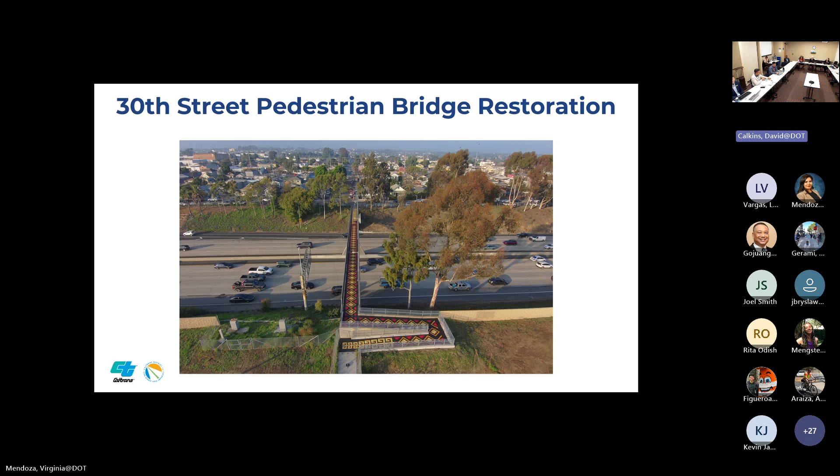All right, so next we have our California Walk and Bike Technical Advisory Committee update. Everett, are you on the line here today to provide an update?

He may not, but I have the text. Okay, Brian Gaze again, I actually sit on this committee with Everett, and unfortunately I don't believe either of us made the meeting, although I do have the agenda up front. Oh, there he is. I didn't know if you were on or not. Sorry, I think we meant to hit mute. Okay, no worries. Yeah, so basically, to be honest, the last time we were here at this meeting, I kind of presented on this as well, and it actually looks like, based on what I see on the agenda, it's sort of a similar update.

They always give a really good legislative update in terms of new initiatives winding through the State House. There's an update on transit policy, which I assume aligns with the policy just mentioned. Then another emphasis on transit, on some work being done in D4, a toolbox of strategies and applications on transit and bike-ped access, and then just local updates. So I wish I had more to report. Everett and I both had conflicts, so on behalf of everyone from D11, we apologize for not making that statewide meeting, but won't happen again, right Everett? So anyway, transit focus, legislative updates, and more to come.

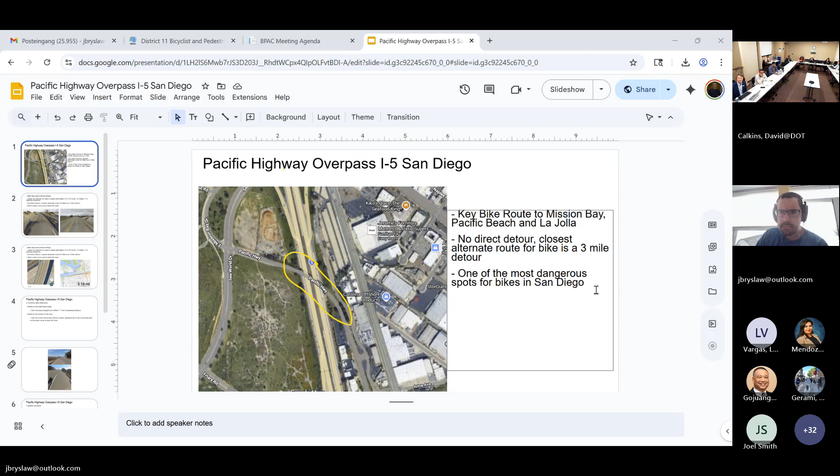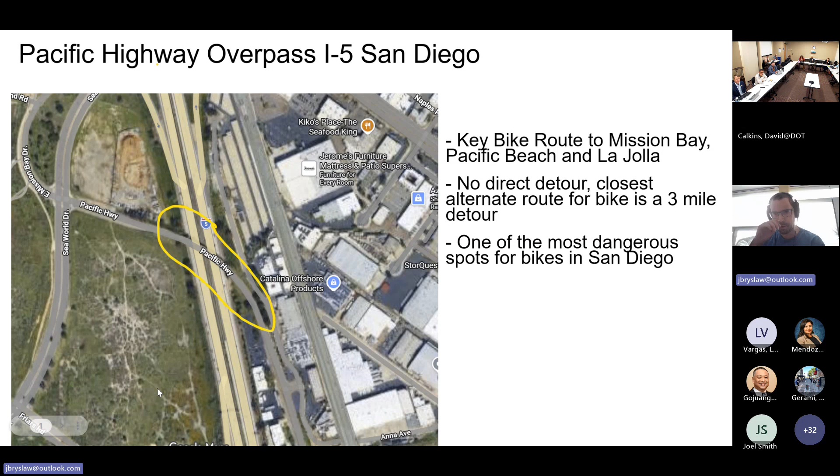Okay, thank you. So I just want to take a few minutes to discuss this. This is the Pacific Highway overpass over I-5 in San Diego, and it's a key bike route to Mission Bay, Pacific Beach, and La Jolla. But it's one of the most dangerous spots for bikes in San Diego, and there's no direct detour. The closest alternate route would be a 3-mile detour.

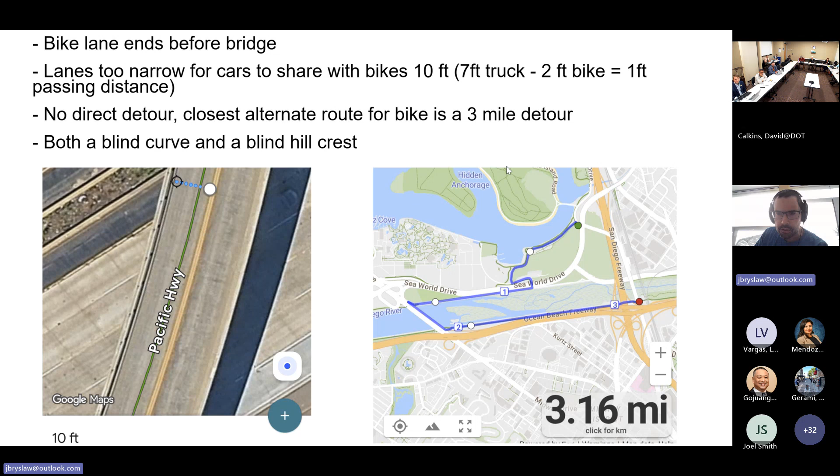The problem is there are bike lanes on the road before the bridge, but they end right before the bridge. And on the bridge, the overpass, the lanes are too narrow for cars to share with bikes. They're 10-foot lanes, so for example, if you have a 7-foot pickup truck and a 2-foot bike, that would leave less than 1 foot of passing distance. I show the measurement here. And like I said, here on the right, the closest detour is a 3-mile detour.

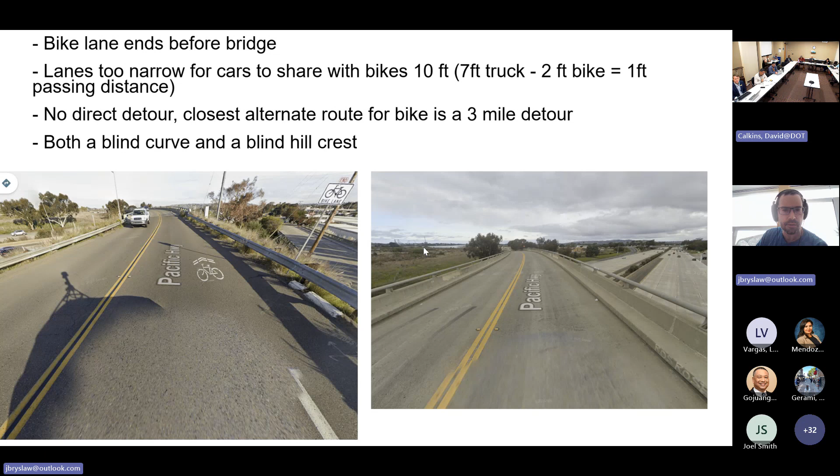The other problem is the bridge is both a blind curve as well as a blind hill crest. So when you're going over the hill, you can't see past the crest, which means it's also dangerous for cars to pass in the second lane.

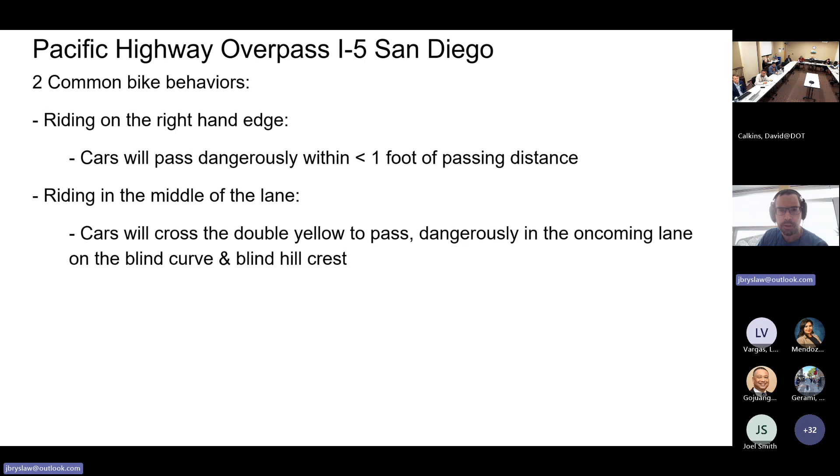So there are 2 common ways bikes will approach this. The first is a bike will ride all the way to the right. If you do that, cars will pass dangerously within 1 foot of you. The second most common behavior for bikes, and actually there's a sign saying you can be in the middle of the lane, is to ride in the middle of the lane. But if you do that, cars will cross the double yellow to pass into the oncoming lane on the blind curve and blind hill. I just wanted to show a video where you can see both.

So I was just wondering, since this is such a key route, if something could be done. I'm not sure exactly what the best solution would be. Perhaps lowering the speed limit, traffic calming so that drivers don't feel the obligation to pass bikes, maybe signs saying explicitly not to pass bikes, or maybe a flex post median. Thank you.

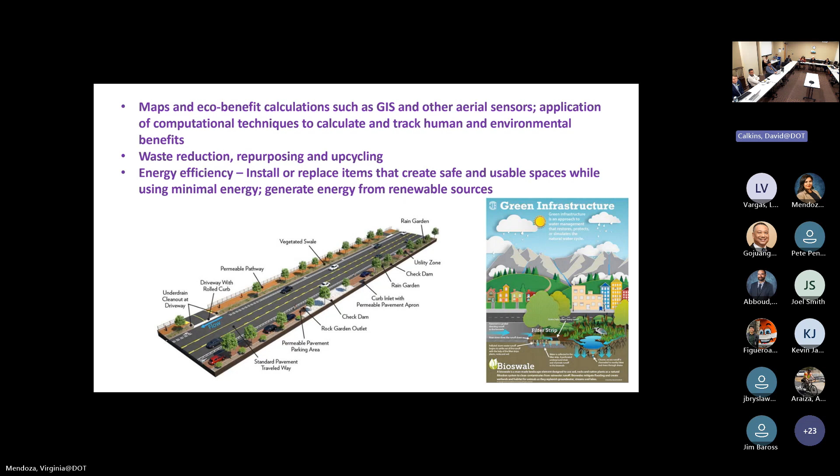So what are the benefits to Caltrans of using carefully designed green infrastructure? There's increased safety by reducing flooding, erosion, heat, air pollution, water pollution.

One of the projects we're working on now is for the Mountain Empire School District on excessive heat, out in Campo Elementary and Campo High School. Who would have thought that's green infrastructure, but that is certainly part of it.

Increased habitability, including for bicyclists and pedestrians, reducing heat and pollution as I just mentioned. Increased accessibility by designing passages that are safe and habitable, contributing to Caltrans goals. You have goals now about sustainability at the state and local level, quantifiable benefits of reducing air pollution, stormwater runoff, erosion prevention, water retention, all of that. And again, it's quantifiable because it's measurable.

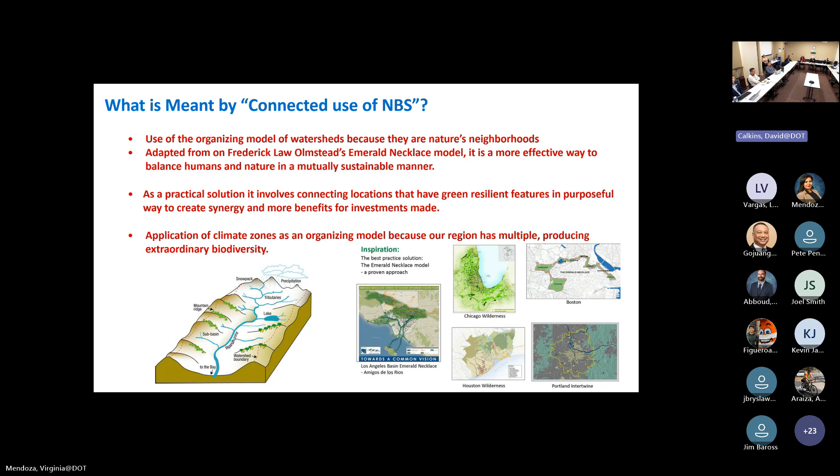Watershed-based planning, and unfortunately, if we had done all our community and neighborhood plans based on watersheds, things would be different. There are some places around the world doing that, and it makes so much sense, right? The watershed isn't just a visual, it's water, it's your own little contained living room, so to speak. We started to look at that as perhaps a basis for some of our concepts. Next slide.

As you know, these are our western-facing watersheds. And we chose, you'll see a little bit about a report in a bit, to focus on the San Dieguito and Otay River watersheds as the two we started looking at in more detail. Obviously there's a lot more.

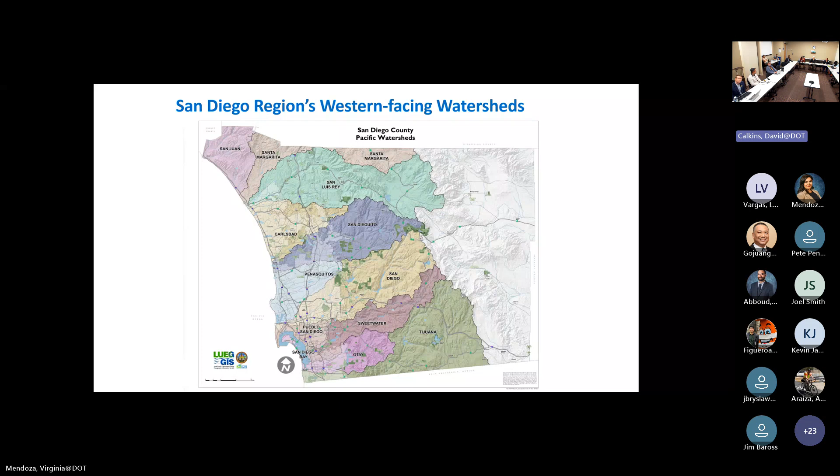Now the next slide, when you overlay that with our county climate zones, you begin to see that, obviously there's a lot of different versions, but this is considered from the Natural History Museum, some of the major climate zones. Next slide, put these two together.

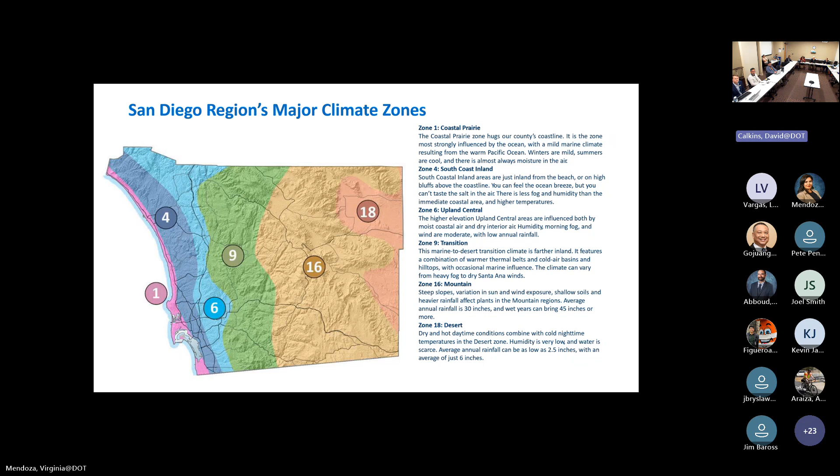And you get this kind of tapestry. Next slide, please. You can see the watersheds with the climate zones, and you kind of get this little embedded matrix of things.

To do really good green infrastructure, nature-based, you've got to do what's unique to that area. For example, I'm not going to put Torrey pines that are native up here in La Jolla down in Otay Mountain. It doesn't make sense, right? And how native is native? So next slide.

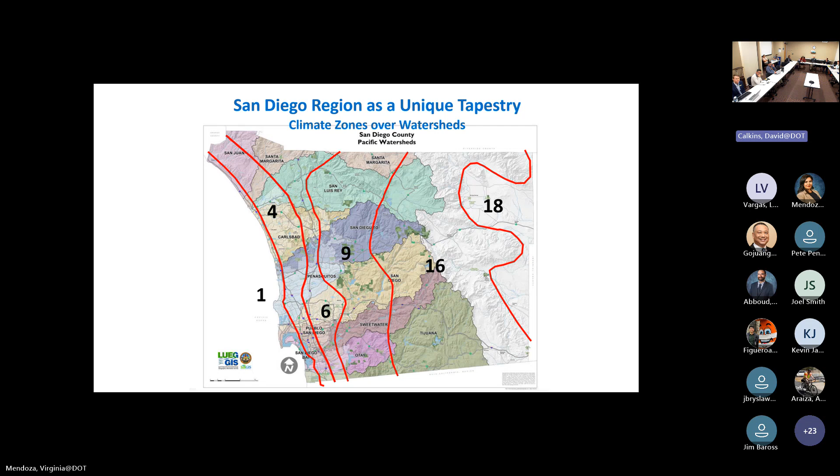One of the things, unfortunately, different cities have different values, but we really are in a race against time to shape our region to be as sustainable as possible and as resilient as possible. We've had fires that have wiped out massive areas, and when sea level rise happens, the same will happen on the opposite side. So the status quo, what we're doing now, really needs to change.

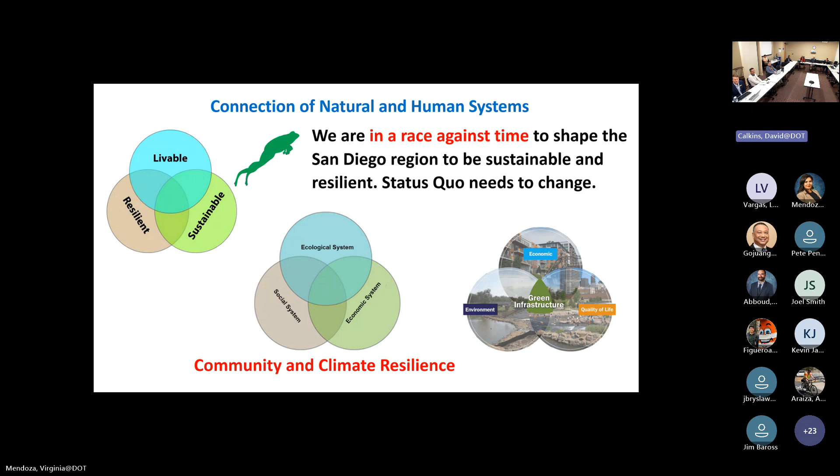I'm not going to get into all the detail of these diagrams, but essentially the frog represents - I know it's kind of funny - leapfrogging forward. It's livable, sustainable, resilient. Those are key factors as we go forward. Next slide.

So some of the projects that we worked on—boy, that is dinky from back here, isn't it? I'm going to cheat and bring up my phone as well, so I can at least read it, because I don't have this quite memorized.

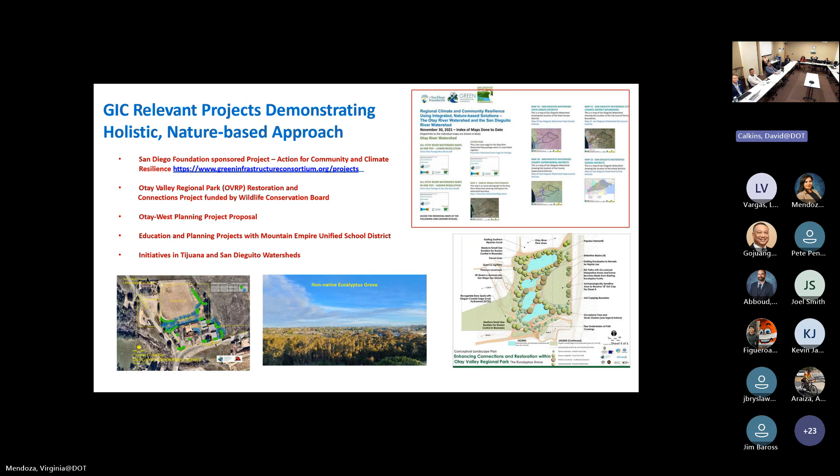Again, it's all about being sustainable and reusing what we have. The grove in the lower picture is what it looks like looking north from just off of Main Street.

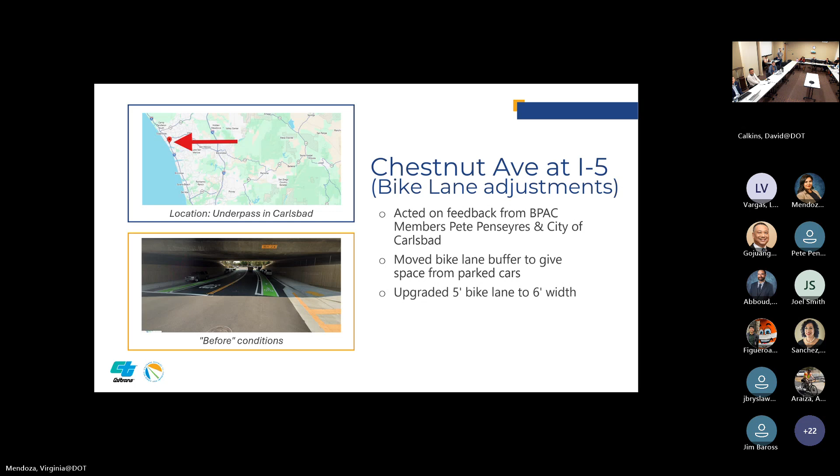Yes, we have an update in Carlsbad. At the last meeting, there was concern brought up about the newly constructed bike lane in the door zone, and you can see the before conditions there. We worked with the city of Carlsbad and Caltrans functional teams to increase the size of the bike lane and move the buffer to the door zone. As Keith mentioned, we've worked on that. It's very close to being completed, but as of today it's still being finalized with the contractor. We have the plans here that are all approved, so you should be expecting to see that at Chestnut very soon.

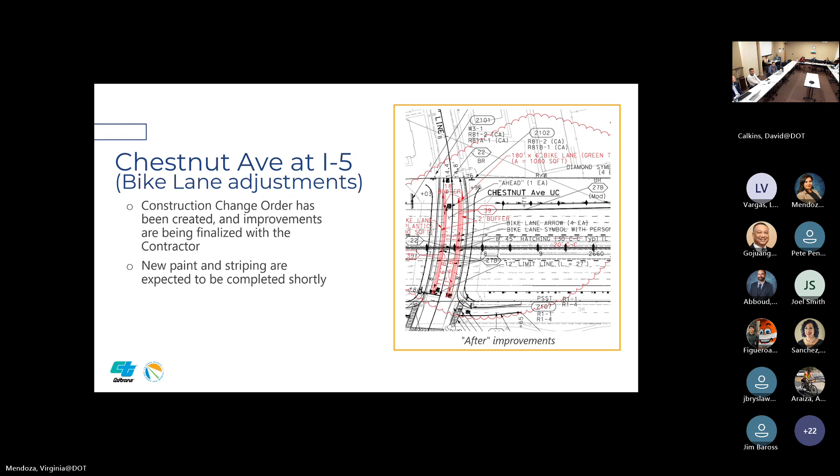So we recently received some inputs on the off-ramp at Palm Avenue at I-5. We fed this through our internal system, conducted an investigation, and it's been approved to install no right turn on red signs. So that's been approved, it's just awaiting funding. I think that's all for this one.

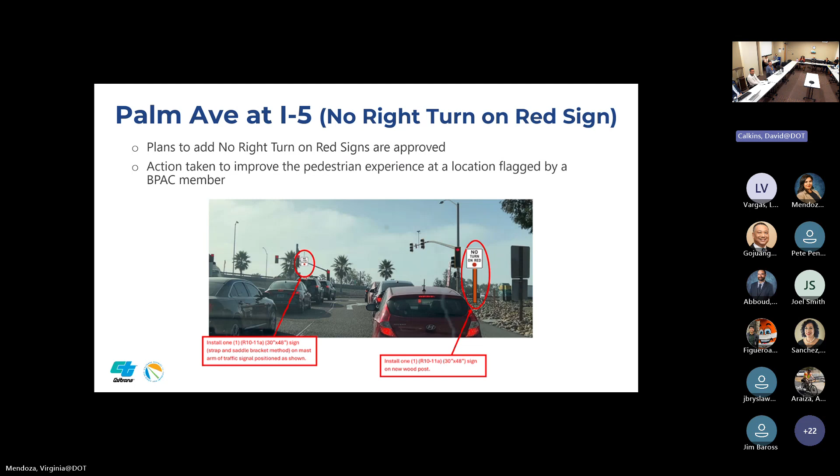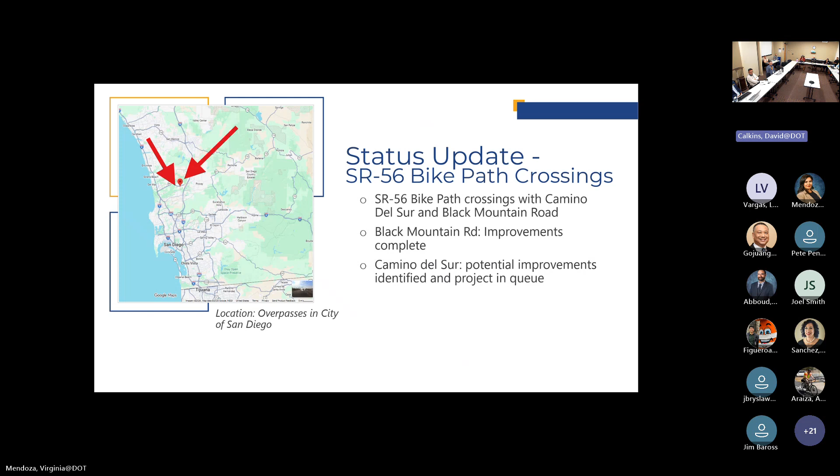Next, we got lots of comments on SR 56 crossing the bike path at Camino del Sur and Black Mountain Road. Did the same thing - there are actually some projects in recent history that were finished and installed, and one that was investigated and approved and is also awaiting funding. So I'm going to show those right now. The first one is Black Mountain Road.

So like I said, this was in recent history. The project was approved and it's out in the field. We did install enhanced signage and a blank out no right turn on red sign. So right turns are restricted on the off ramp, eastbound off ramp going south, and northbound going onto the eastbound ramp.

Sorry, didn't get a map there. Next one.

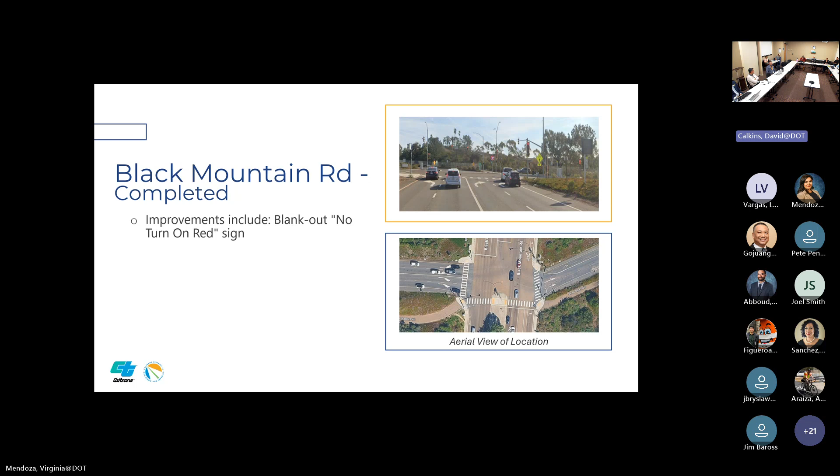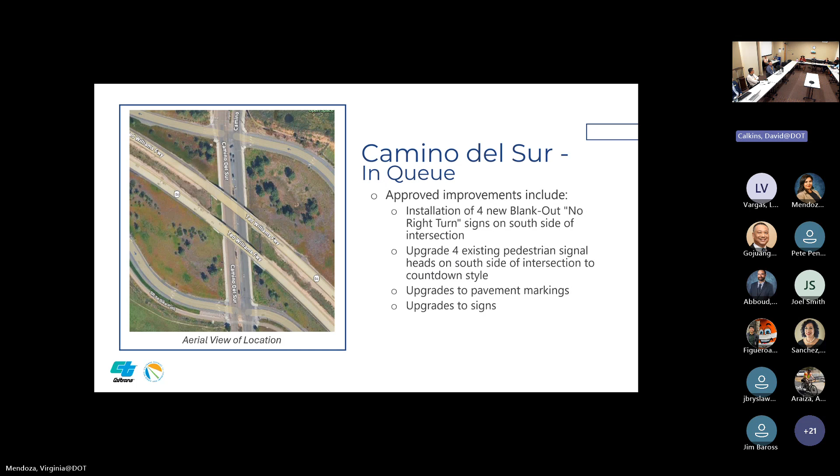So this is a similar situation, and it's going to have more of a suite of upgrades. Can you go to the next slide?

So with this one, this diagram is showing the similar upgrades. There's going to be the same no right turn on red restrictions. There's going to be enhanced bike lane striping, green striping. There's going to be PED countdown at the crossing there, so bikes can get a timed crossing, as well as pavement markings on the bike path on the approaches to the intersection, Camino del Sur. So, like I said, this is approved and it's awaiting funding.

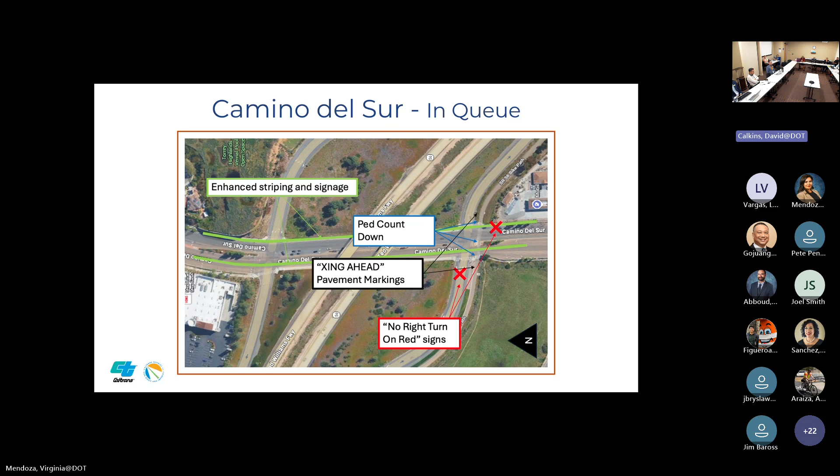Yeah, and I believe that's it for this section. Next slide.

Great. Are you giving this one, Trey? Yeah, sure. All right, thank you, Alex.

There was another comment at the last BPAC meeting. It's come up in prior BPAC meetings asking about how you can cross I-8 west of Morena by bike. And because this has been brought up several times before, we thought it'd be good to try giving you a more broader view of what has been done and what's going on in the future. In the slides you will see some links with resources to where you can see each of these specific plans and projects. So we'll quickly go over some recent accomplishments, including Caltrans, and then long-range plans, which also include work by SANDAG, City of San Diego, and others.

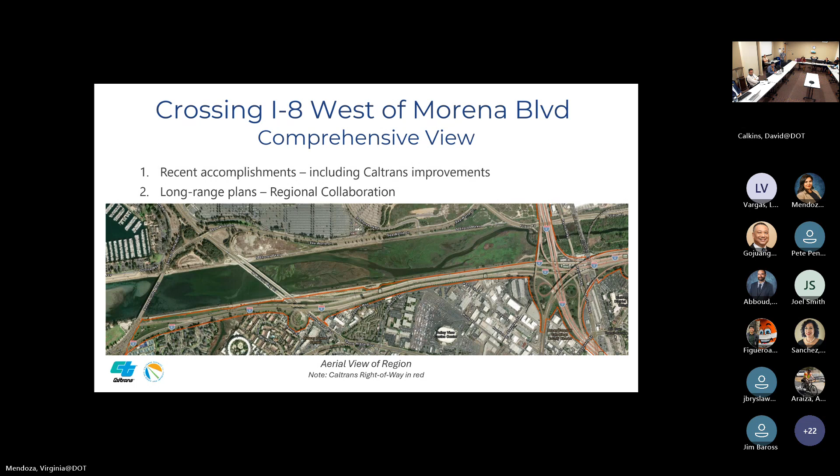And before you go to the next slide, this slide has the Caltrans right-of-way in red. This is a subject to look at in close detail because the right-of-way does dictate who can do what. So when you look at this, for example, at the Nimitz intersection at the very left side of the picture, you can see which part is in the Caltrans right-of-way and which part is not. Next slide, please.

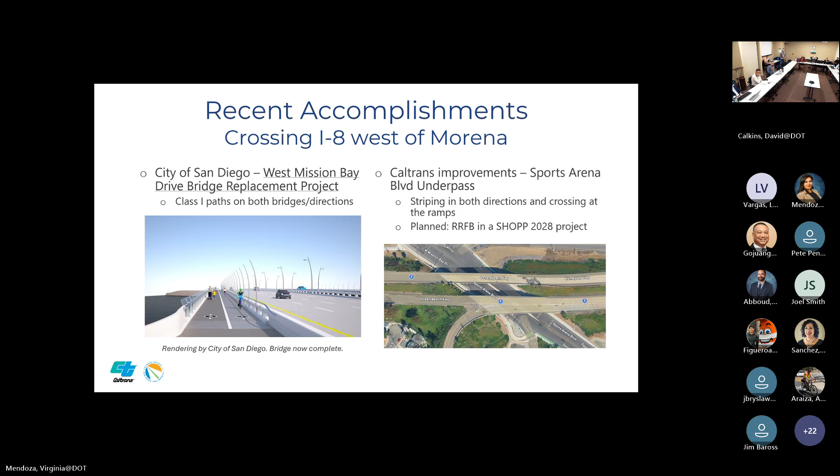All right, thank you, Trey and Alex, for those updates. Did anyone have any questions or comments on those items? Yeah, Josh?

Hi, can you hear me? Sorry, can you hear me? Sorry. Yes, we can. Okay, thanks.